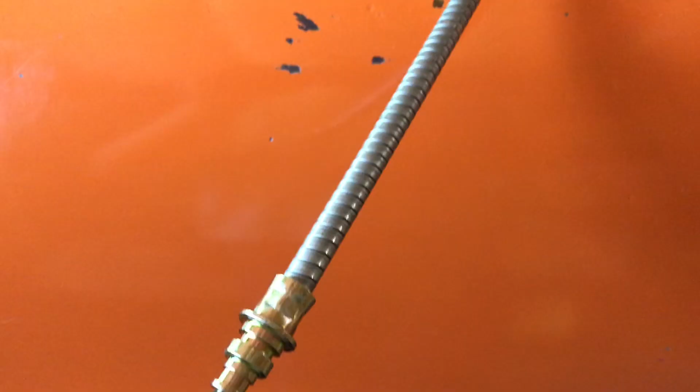They retail for around $100 and it's a very well built cable, and I'll show you some of the details about it. So this is the cable here, fully laid out on my hood. It's a very nice construction. Everything is crimped on there, and everything's a nice coated connector so it won't rust at all. The cable is very heavy duty rather than stock. The stock one is a lot skinnier than this one, and this is actually a coated cable.

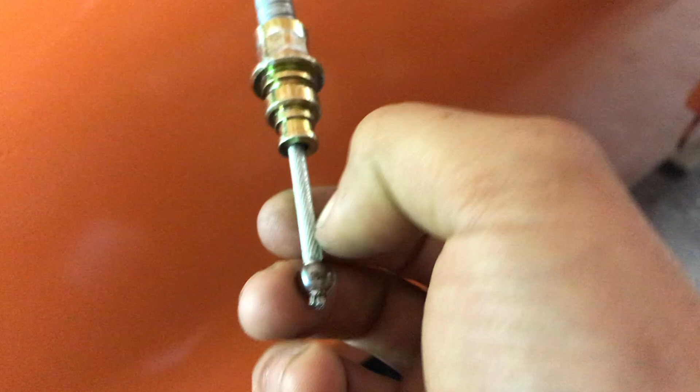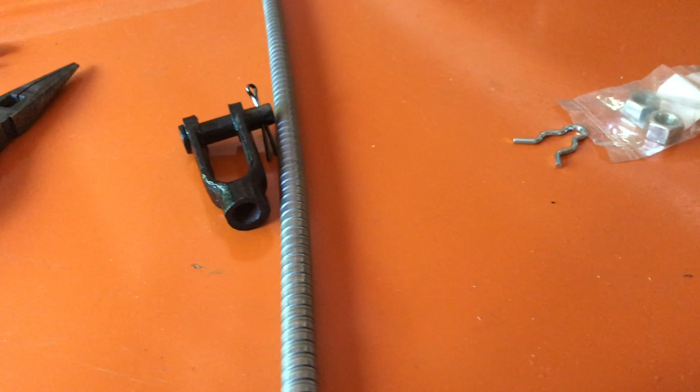You could barely feel the ridges, which allows it to, A, not rust so it won't seize up, and B, glide really freely through the casing here. And the casing, I believe, is galvanized, so that also prevents it from rusting. It's got all the necessary little connectors, and they included the hardware to install your little clevis here, which you have to save from your old one when you pull it off. And it has the nice threaded end too, to allow you to thread that on, along with the jam nuts. And this little clip here clips into the end when you install it in your parking brake.

So I'm going to pop the hood, and I'll show you how to take your parking brake handle, as long as you have one. I had to purchase one because mine was missing. I'll show you how to move that down and get the front of the cable installed. And then from there, I'll move under the vehicle and talk about how to take up the slack in the rear portion of the parking brake cable and how to adjust it correctly, so as soon as you pull the handle, you start to engage the parking brake. But first, I want to show you a quick diagram and the tools you'll need for this job.

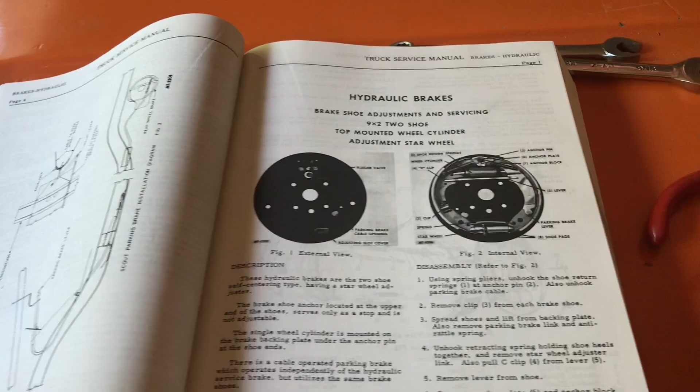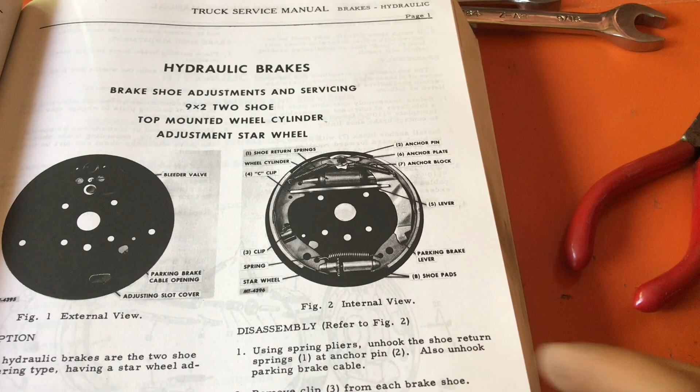So here I have my service manual opened up to CTS 2190, and it shows a nice diagram of what I have in my Scout. In this case I have the 9x2 brakes. So this is what the setup is going to look like. If you watch my Dana 27 axle shaft video, which I'll link up here, you saw me installing this and kind of explaining how this works.

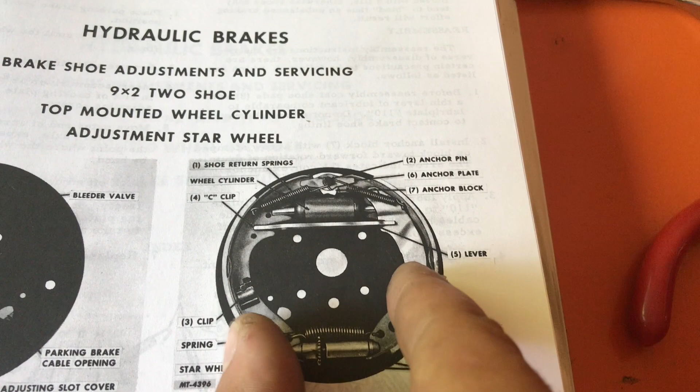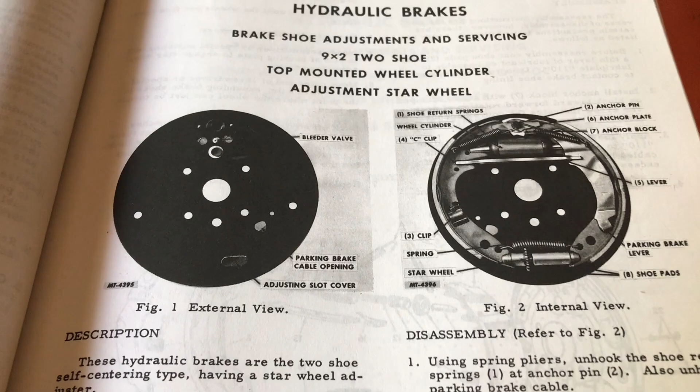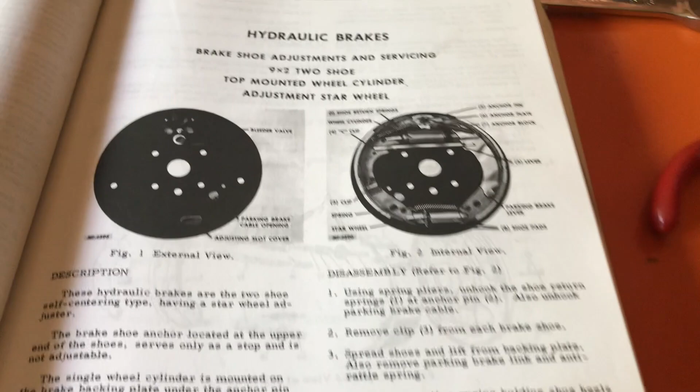But basically, this little parking brake lever is pulled out by the cable, which moves it and kind of spreads it so the brake shoes meet up with the inside of the drum, and that's what holds your car, besides putting it in gear when you want to park it somewhere. So this is crucial to have, because I've put my car in gear, sometimes even third gear, and it'll still try and roll down my driveway a little bit, so I had to put a wheel chock in front of it. So this is a must-have if you plan to drive your car on the street. It's just another safety option, and I think it's illegal to not have a parking brake, so it's a good thing we're doing this now.

And as far as a diagram of what it looks like fully installed on the car, here we have a diagram of the drums and that cable, which I'll show you at the rear of the vehicle that I already have installed. It's actually the original one, and it still works good. I just greased it up. So that's going to pull on this on the inside, and then it's going to pull through, and then you have this sort of lever, which I'll show you in a little more detail. Actually, here's a good diagram of it. You have the cable to the rear brakes, and then you have this lever that gets pulled on.

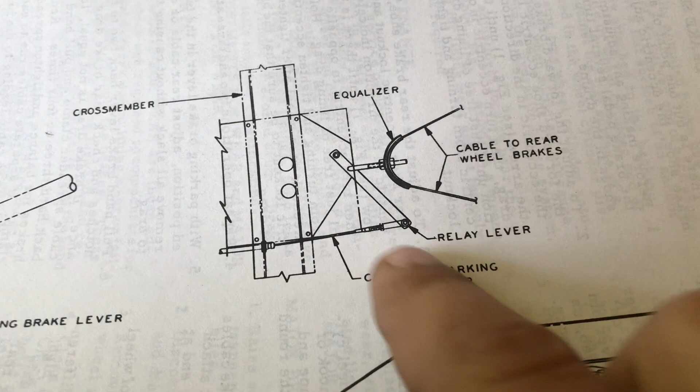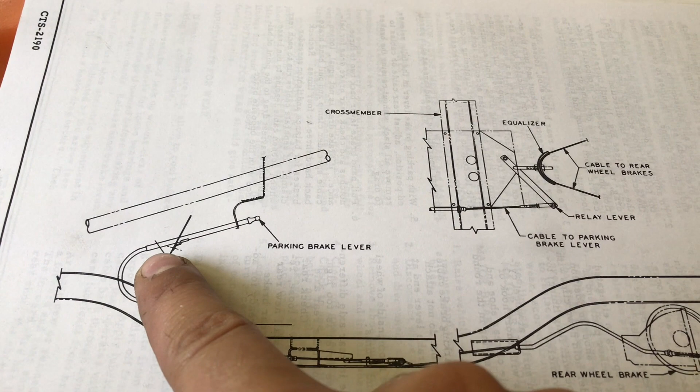You have the little clevis here, which is that black piece there, and then your cable is going to run through the frame and kind of click in, and the little part that clicks in is over there, and that is going to run all the way up through and then come back around into the end of your parking brake lever, and that is held on under your dash. When you pull on it, it cinches up the cable, which cinches up the lever, and the lever gives you a mechanical advantage, which allows you to pull that brake out hard enough to put these shoes as far into the drum as possible, which stops your vehicle from rolling and gives you the safety feature.

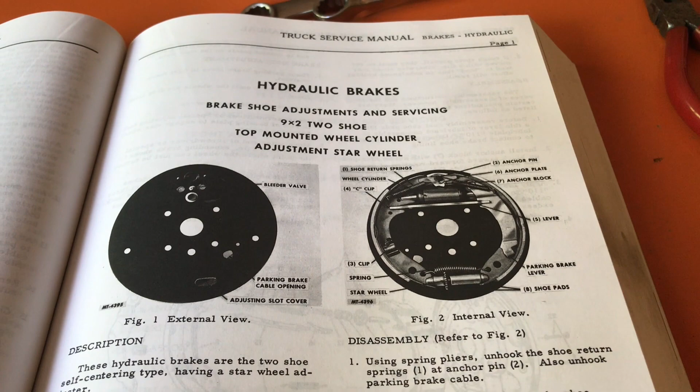So now I'm going to go under the vehicle and show you how to install it. But before we begin, the tools you'll need for this installation are a pair of needle nose pliers to work the cotter pin on here, and to put in this little spring clip on the end, and two 9/16 wrenches for the jam nuts.

So I'm actually going to go under the hood first and anchor down to this point, because from there that'll determine how much slack we have in our cable, and how much we have to thread this on to pull the slack out of that. So I'll show you that first.

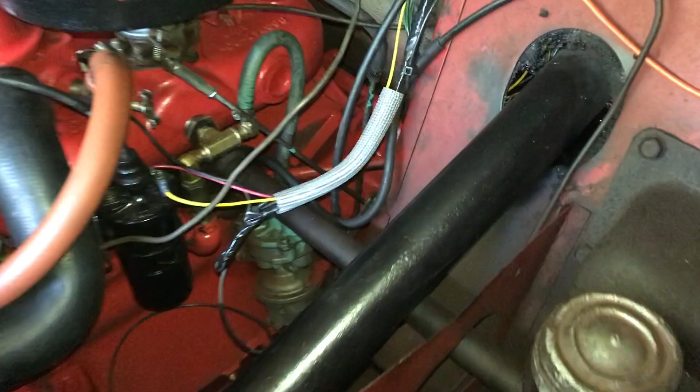So here I have my parking brake lever. I was able to dig this one up off eBay. They pop up every once in a while. I paid like 50 bucks for it. It was sandblasted and ready for me to paint, so I just painted it with my favorite black paint.

I used a Krylon rust protectant. It's like $4 a can, and it's just great. It's super durable, resists against gas spillage and oil, and if you paint the heads of bolts, it doesn't really come off as long as you're not too aggressive when you're wrenching it or using a socket to get it back on.

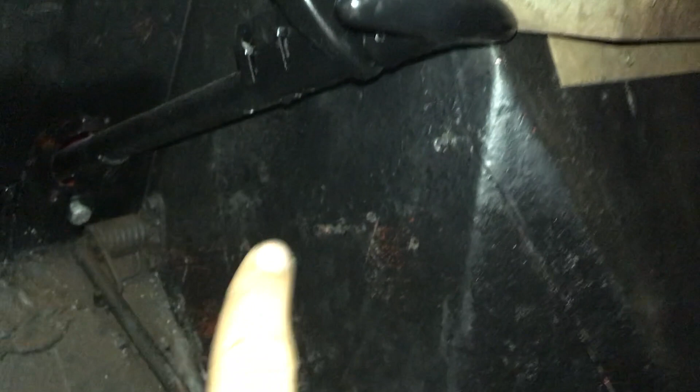So in order to make it so your parking brake lever can accept the cable, there are these two things here, and I already have it pushed out so the cable can slide in. But what you want to do is take this lever and move one of these at a time, because I'll pull it back out for you. There's this little groove right there that engages with one of those. It's kind of like a safety thing.

In order to disengage your parking brake, you actually twist it this way and slide it back in, but it stops automatically. So now what you're going to want to do is either use your fingers or take pliers, and you're going to move these little slides. You're going to kind of twist them so they move up and out of the way of that groove so you can push it down. There's two of them, so you got to do this twice.

And at that point, this handle right here, the edge of it will almost become flush with that. And that allows you to fit the ball end of your parking brake cable into it, and then you pull this back out, and then you clip it in with that little prong clip, and then from there you could move it through the bottom of the vehicle, route it through the little hole in the frame, and then we'll talk about adjusting it.

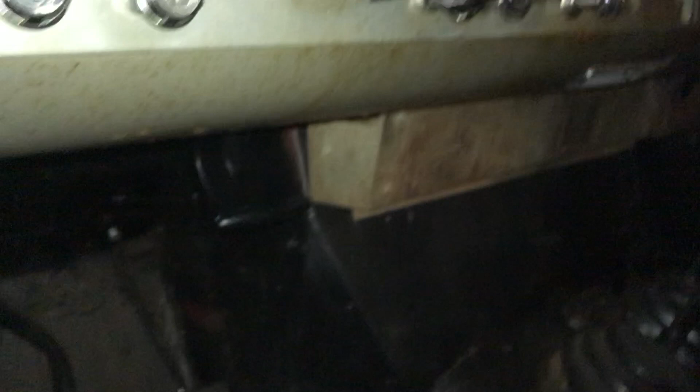So I'll show you how to do this quick on the end of it. Okay, I just move those one at a time. You kind of have to pull it back a tiny bit so you can move that, and then push it forward, move it back a tiny bit, and then pull that up and push it forward. And now you can see my handle is flush. So now we can move under the hood.

Okay, so now I have my little part out, and there's a little opening at the bottom, and that allows you to slide the ball end in here, and once it's in, you kind of pull down and it locks itself in. So now that that's in, you're going to want to pull the parking brake up until the prongs are back inside, and there's two little grooves on the outside, and that's what you're going to put your little spring clip on. That's going to hold it, so I'll show you what that looks like.

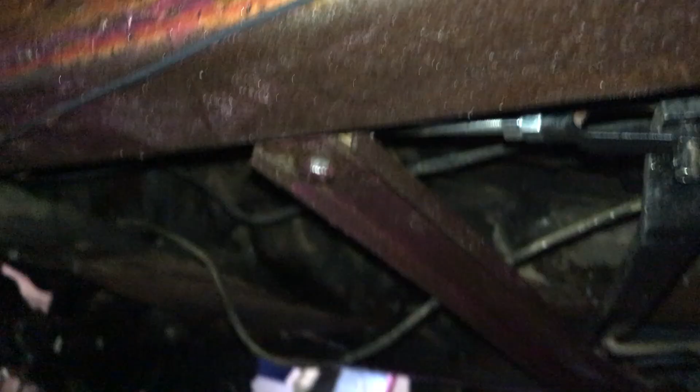Okay, so I got my cable all routed there and the little clip in there, and I pulled the handle back in so it's normal, just like it'd be sitting in the vehicle, so that little brass part is flush. Now, under the vehicle, I have routed my cable through that hole there. It just sits there, and then it's running to there. I put my two jam nuts on that are included, and I put in my little clevis piece.

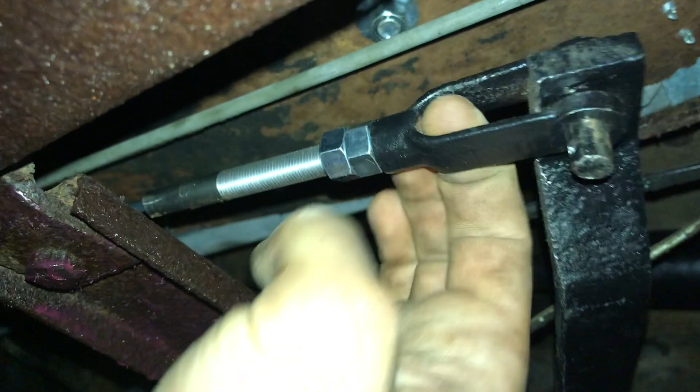Now I have the back of the vehicle jacked up, and I can spin the tires freely. So what you want to do is get the feeling for what those spin like when they're free, and then at that point you can go ahead and adjust this, threading it in to pull as much slack out of this as possible.

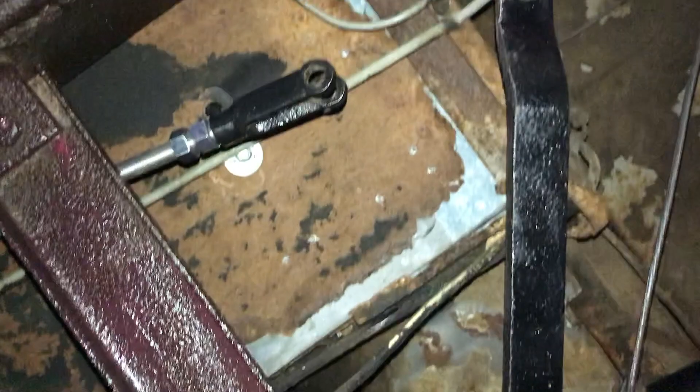So you see I got a bit more there, so I can go ahead and pop the pin out, and I can move my jam nuts down. Probably just back them off a good amount, just so they're out of the way. Okay, and do like one rotation at a time. So I'll just go for two because it was a lot. Okay, so there's that, and then get your little thing here, and there you go, just like that.

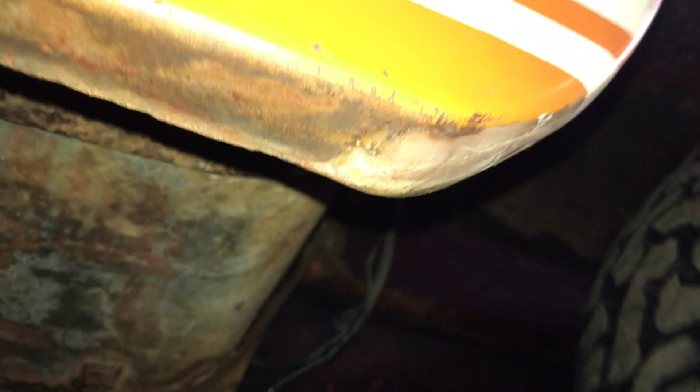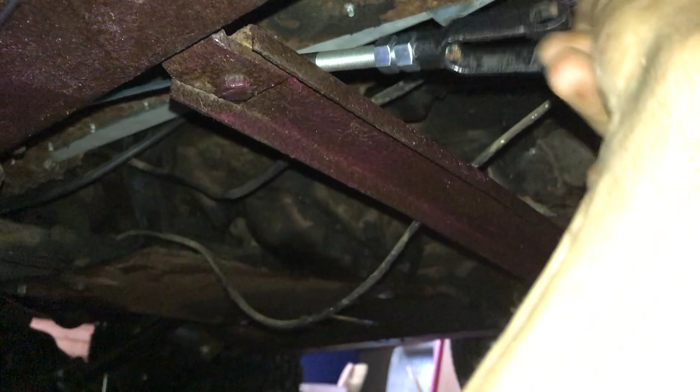And feel the tire. You can still spin really freely, and feel how much slack you have before the cable tension's up. Still a good amount there. So pop it off. I'm gonna do another 2 rotations, and then hook it back on.

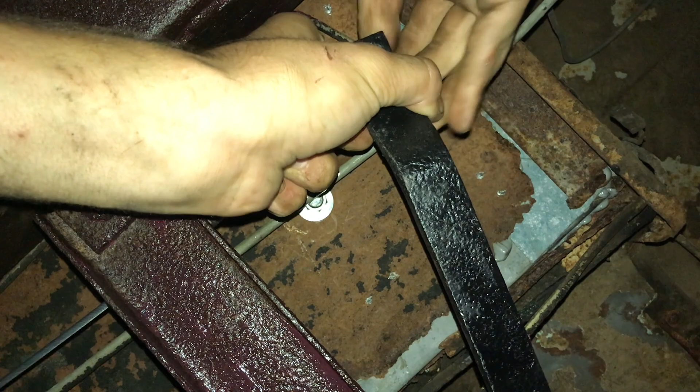Okay, and that feels good right there. I got a good amount of slack, but it's nothing crazy. I can still rotate my wheel freely, it still floats and then stops.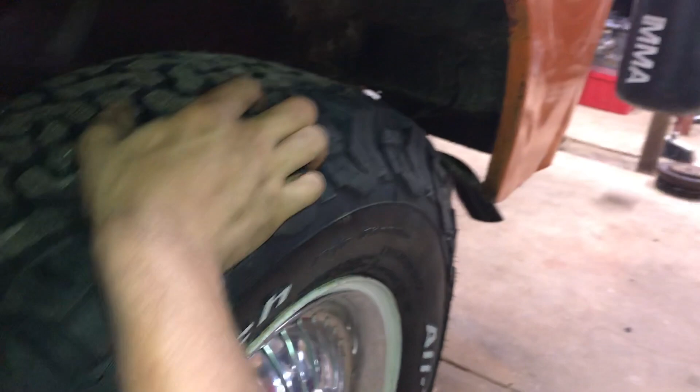And then now I go inside, grab my parking brake. Okay, that's set. I could still move it if I set it even more. Now I can't really move it at all.

So I'm actually going to go ahead and take the parking brake off, set in a couple more rotations on that, and until you can pull it about halfway and get all the pull you need out of it is kind of where you want to be.

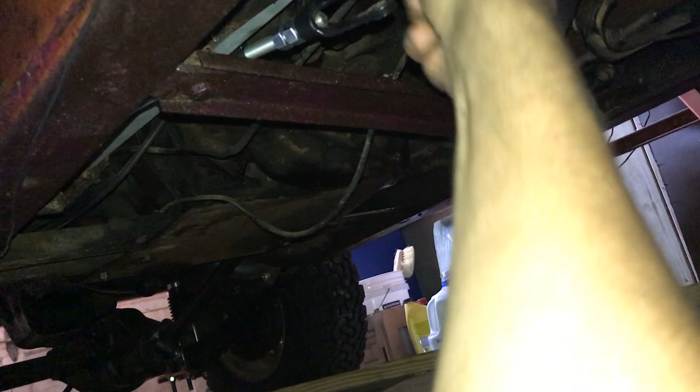So to clear that up a little bit, what I'm saying is you want to do it to the point where you have a little bit of slack, so you're not clamping down on the parking brake all the time, so you're not driving with the parking brake on. Because this holds tension, I'm having to bring the two ends together, and every time I want to do this, because this has a big spring on it, this longer lever arm.

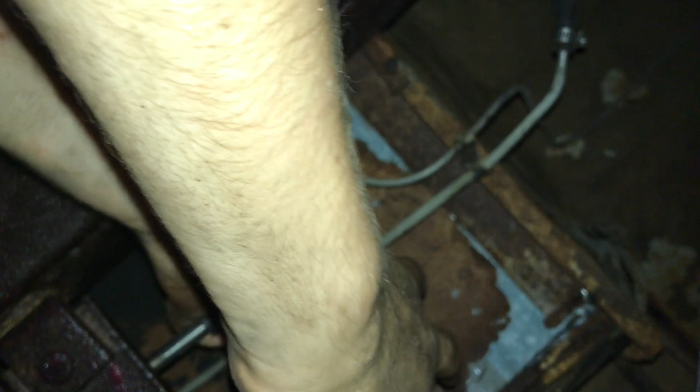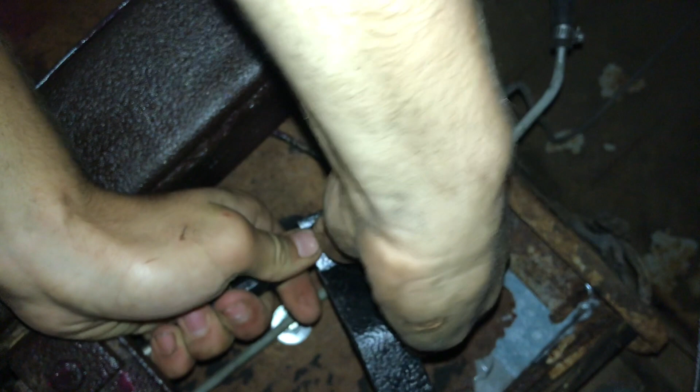So right there, that seems like it's pretty good, but I could even go for a little more, so I think that's what I'm gonna do. So another rotation.

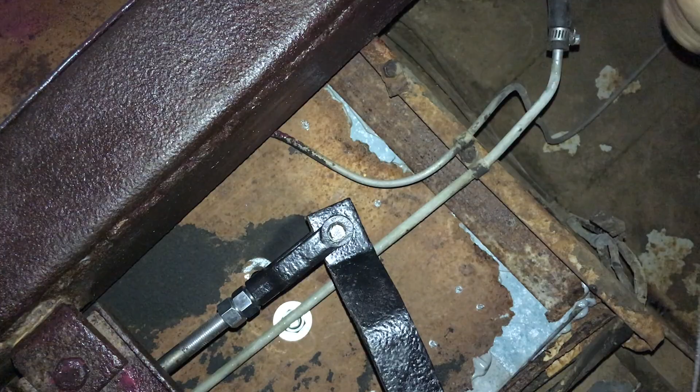And all I'm really doing is pulling the slack out of all the cables and bringing them to this clevis here. So that's pretty good, there's not a crazy amount of tension on there. I could still rotate my wheel just fine, although I can kind of hear the drum rubbing a bit.

So I'm gonna go ahead and back off one full turn and go back on. Okay, hold on. Guys, it's being difficult now. Alright, there we go. So, still got slack.

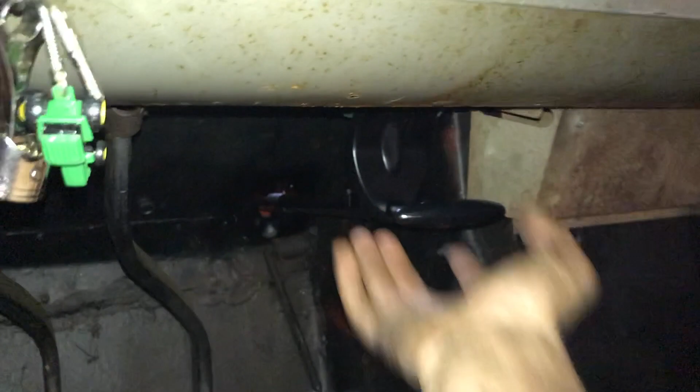And I don't hear it rubbing as much, so I'm gonna call that pretty good. And let's give it a yank. Okay.

That's pretty good, I could still move it, but if I'm really sitting in there, I can get a good pull on it. Now the tire doesn't move. So I'm gonna sit in there. I'm gonna release the brake.

And I'm gonna sit in the car real quick after I lower the vehicle down, and I'm gonna give it a good pull and see how far I can get. The trick: I sat in there and made a comfortable pull on it, like I was just sitting, and I'm about to get out of my car, and I set the parking brake before I go in and go grocery shopping or something. And I did that.

I jacked it back up, and now I try to move the tire, and it only moves when I can feel the hub moving inside the drum because the drums are a little worn, but the tire does not move at all. So it's a perfect setting.

So now what you want to do is take those jam nuts, lock them down, and you're all set to go.

So one thing too, if you're putting in a parking brake cable and your brakes are a bit worn out, mine are brand new with 0 miles on them, but if your brakes are a bit worn out, you might want to look into using the adjuster wheel to spin it out, to expand your shoes a little bit and get them set correctly. Because at that point, you can go ahead and install your parking brake and do the adjustment just like I showed you.